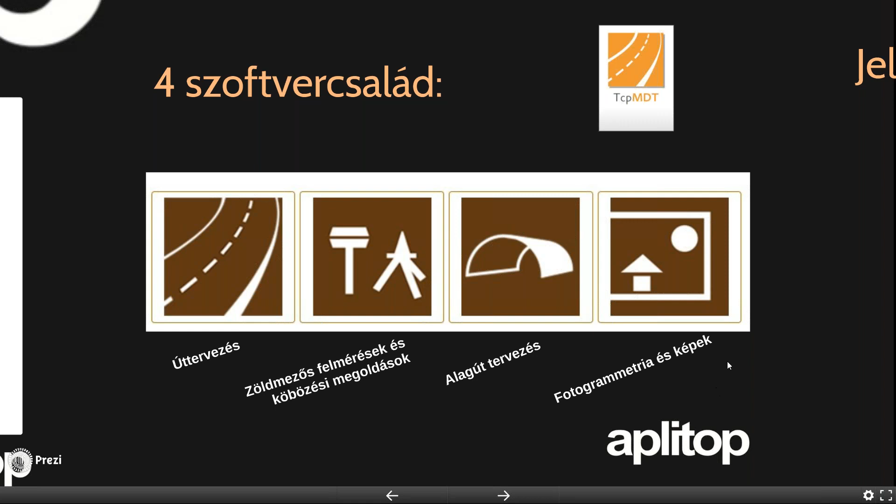To go a little bit more into TcpMDT: it has 2 possibilities, a standard version and a professional version. In both of them, we can add the image modules, the surveying modules, or the point cloud modules.

One of the best values of TcpMDT, because it is a permanent license, is that TCP/MDT was the first company to implement the IFC format, and we are able to import and export terrain surface, horizontal alignment or vertical alignment in BIM format. So we are already working to certainly meet the needs of the future. This is really interesting, knowing it's permanent, that this software can be used for a long time.

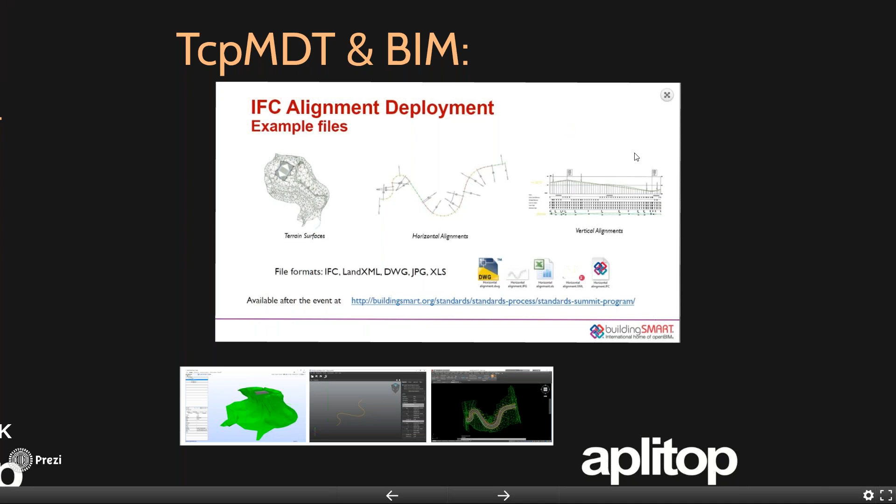Thank you very much for your attention regarding Aplitop and who we are. And now we are going to follow up with the demonstration.

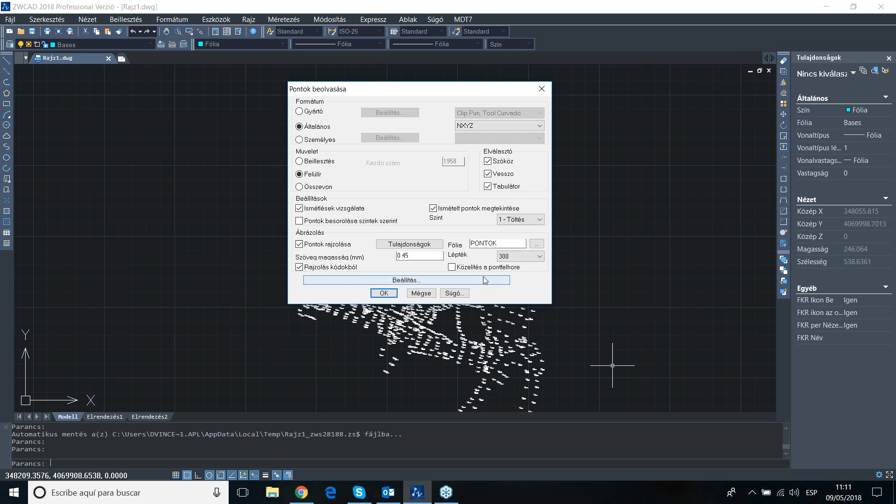So I import the points and I will get this part in just one second. I need my notes because my Hungarian is not so great. I have already imported some points. This is points of an urbanization close to where we are in Malaga.

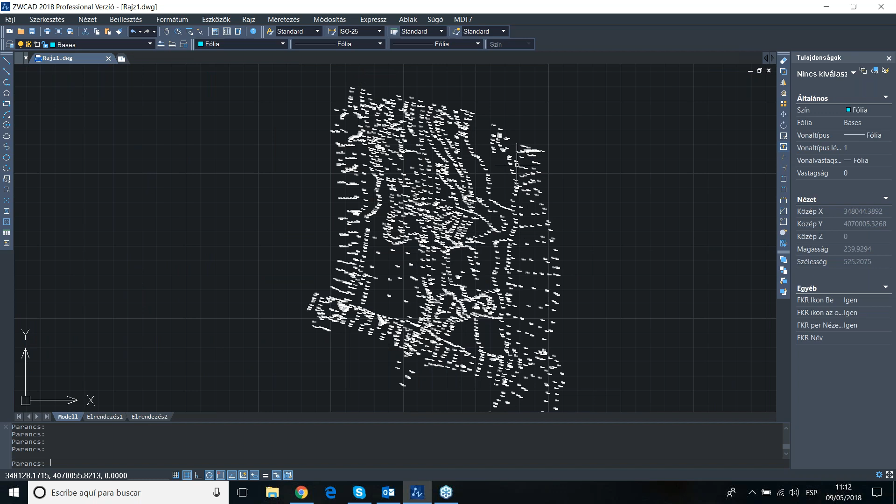Since we have the points, the first thing we can do is create our surface. MDT7, Felületek...

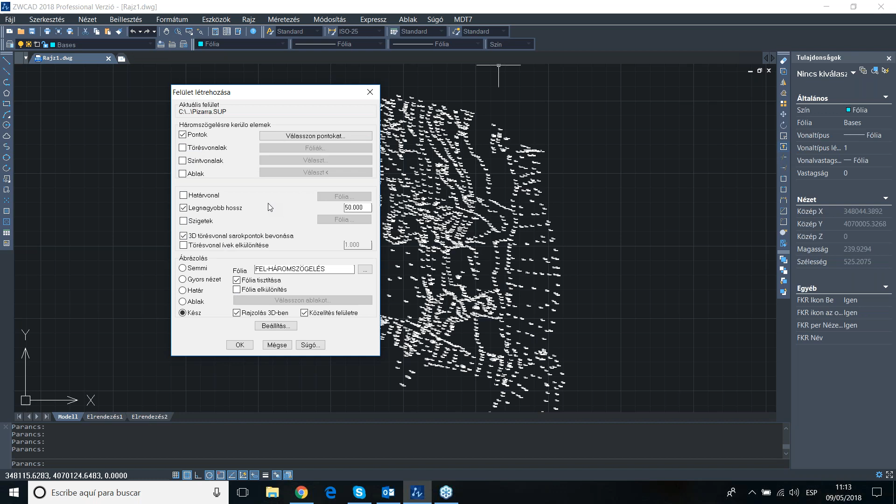So I will import and make a triangulation of this one every 50 meters. I don't want to have more than 50 meters. There is a possibility to incorporate the elements you need for the triangulation, but as I don't feel confident with your language, I don't want to go into all the options of MDT, just to explain small functions.

As you can see, it's very fast, very quick, really productive. In less than 10 seconds we already have the triangulations. There are some parts we are not happy with in the triangulation—for example, this one is really big and we're not interested in it.

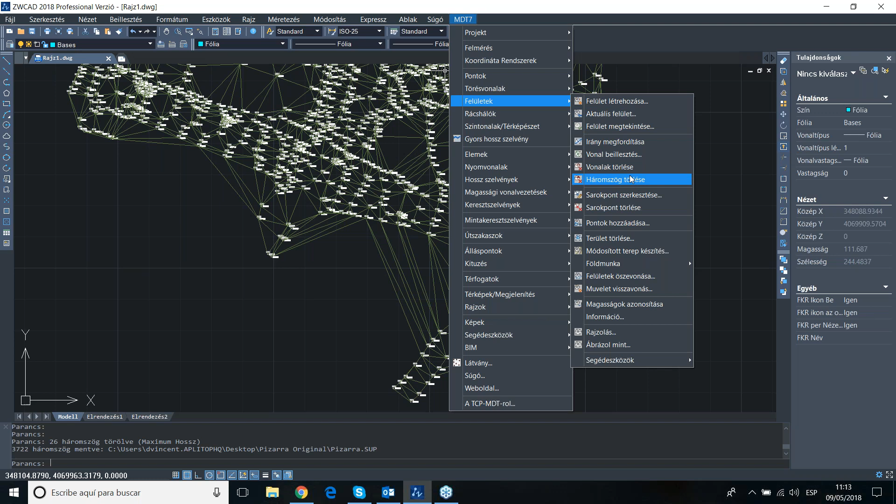You can go to MDT7, superficies, and Háromszög törlése. I select the element I don't want, and this one, and you can delete what you want.

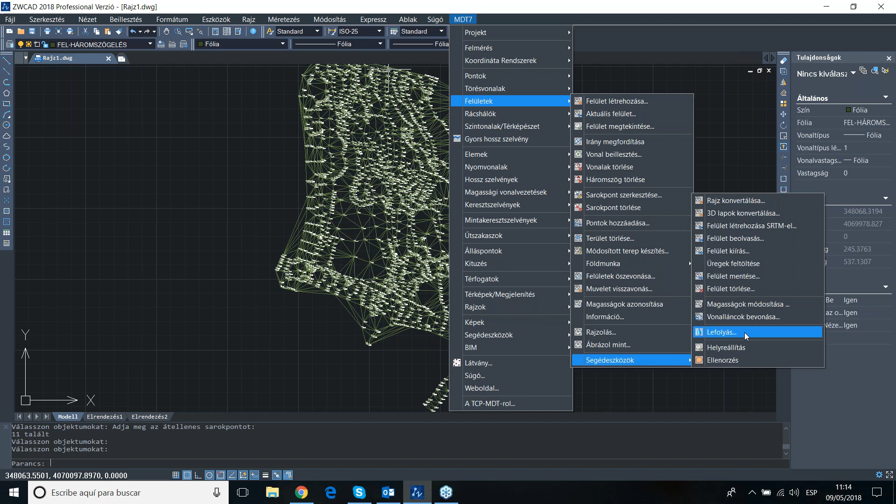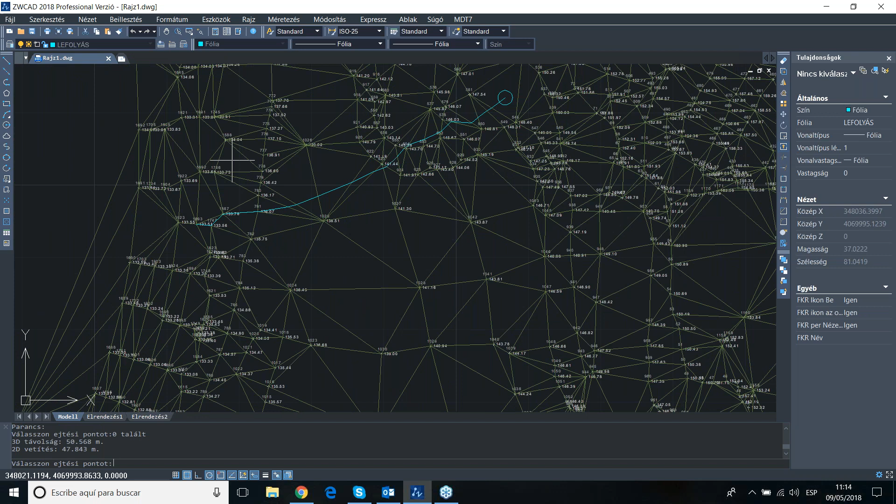There's another specific tool if we want to know about the surface, which is really nice. You can go to MDT7, superficies, and in utilities you have drop, water drop. So you say, I want to know where the water goes from this point, and this is the base, and we see the water will go up to the end of the surface, going this way. We can do another point—in this part, for example, the same, and in this part, the same. This is a great possibility.

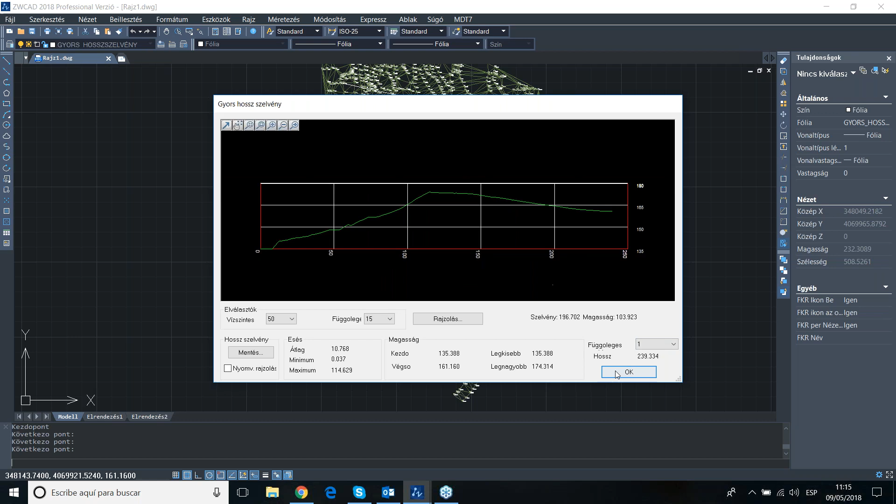Since we know the surface, the next step will be to create contours. How do we do that? Really easy—as you can see, MDT has been developed to find the element really quick and fast. Normally, the average time to understand TCP MDT is around 1 or 2 days, and you can start to be productive. So for surveying or civil engineering, this software is really productive for companies.

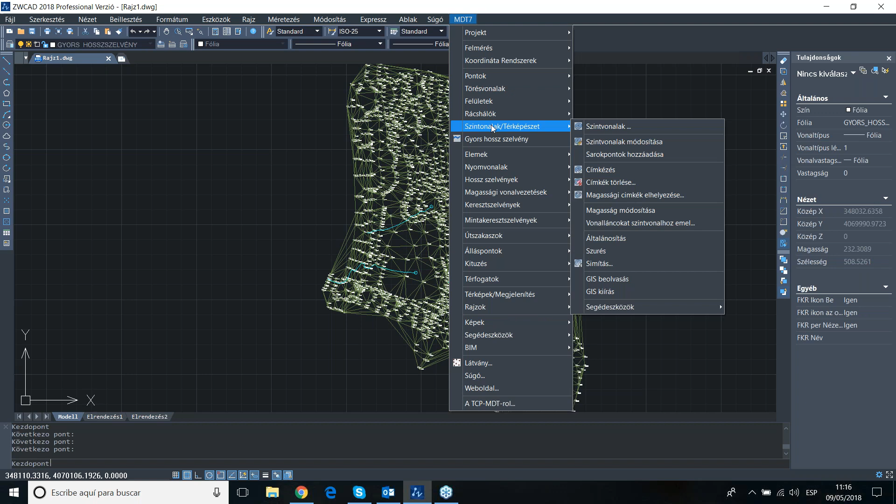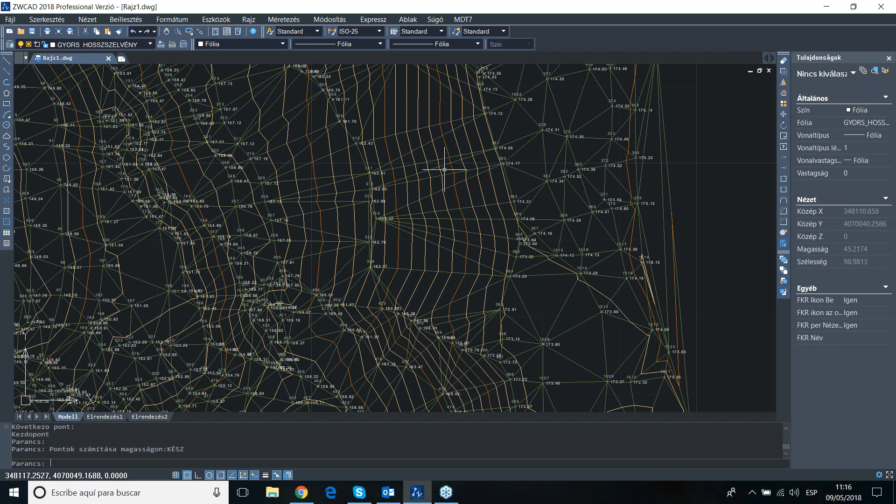So we go to contours and get the contours, from this surface. As you can see, we get the fourth, small one and the big one—the minor and major lines of the contours.

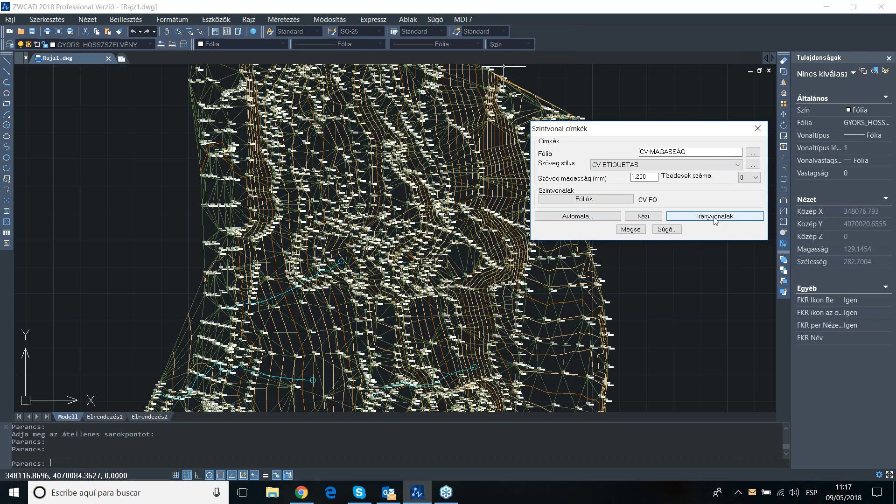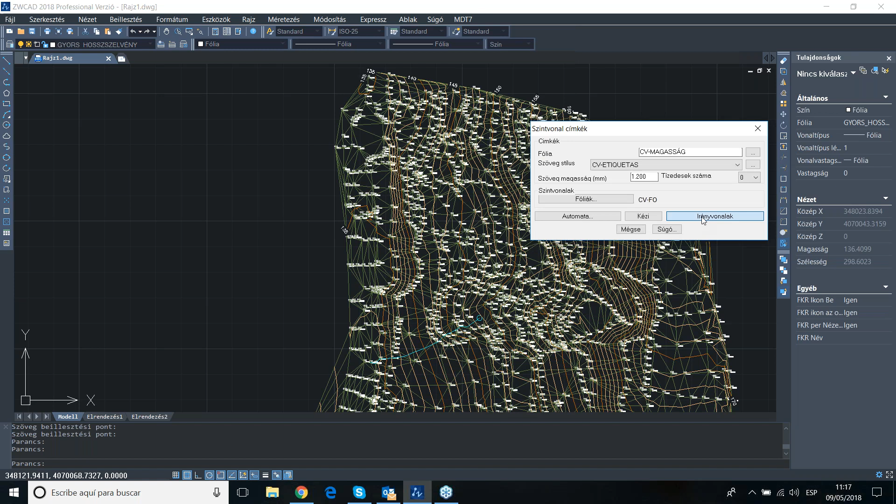I'm going to proceed. Okay, and you have the point. The last one that I like, which is really nice, is by direction line. If you want, I'll do it here, and you choose one, draw your line, and automatically it will draw your code on this part.

There are several modules, as I told you before in the introduction of Aplitop TCP MDT. One of the modules is the surveying module, with all these functions, to coordinate for total station observation and this kind of thing.

If we want to convert from one datum to another datum, is it possible? You have a lot of possibilities. This is to convert from one datum to another datum, and you already have the Hungarian coordinate system implemented in TCP MDT. All has been already developed.

The second module, which is not necessary to purchase since they're independent modules, is the image module - TCP Image. For example, there are several possibilities, but imagine I want to go to local map services.

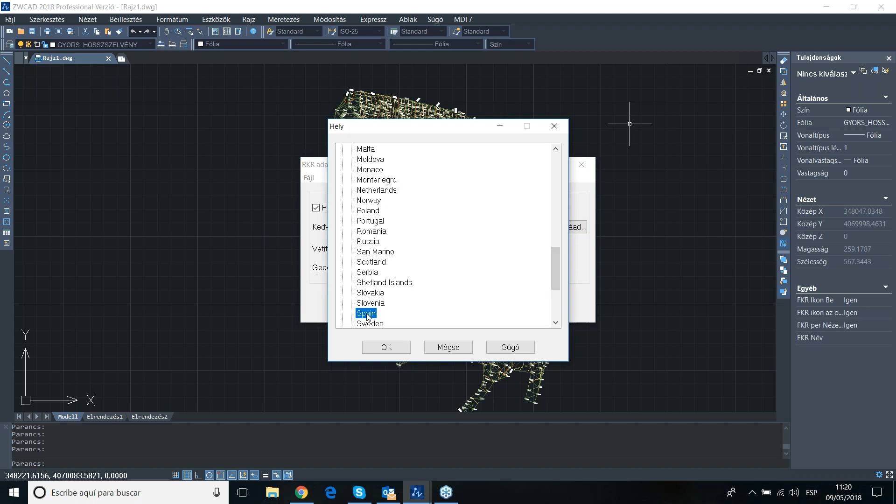Spain, okay, and here. I need to put the reference of where I have taken this, where my terrain is in the field. If not, it's not working. That's why. Okay, and now I can do it. So I select where I want to download the image.

I need orthophoto - really important, really important. This function, I will explain at the end what's happening with it, okay? It's really nice, really important. I'll explain at the end of the demonstration why it's so important.

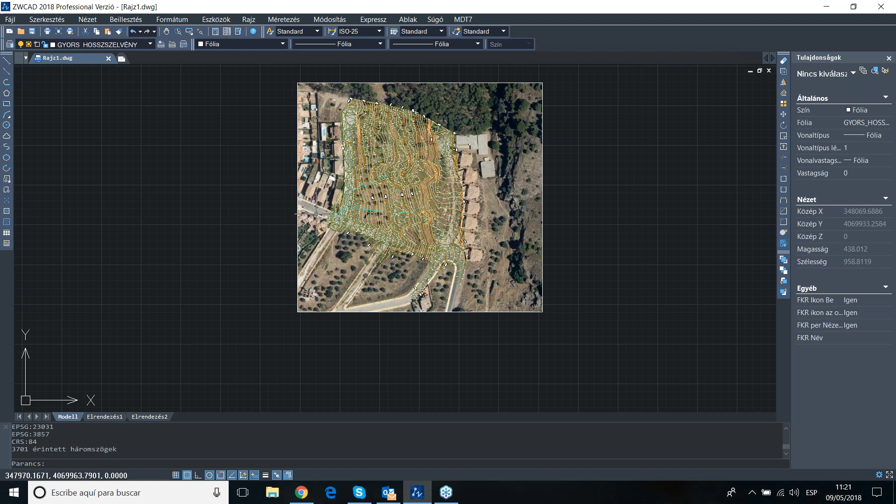As you see, our terrain has been captured very well. This is the urbanization, and we want to do this new part of the urbanization. This is the actual road, and this is some way not finished yet. This is one of the possibilities of the image module. Let's continue.

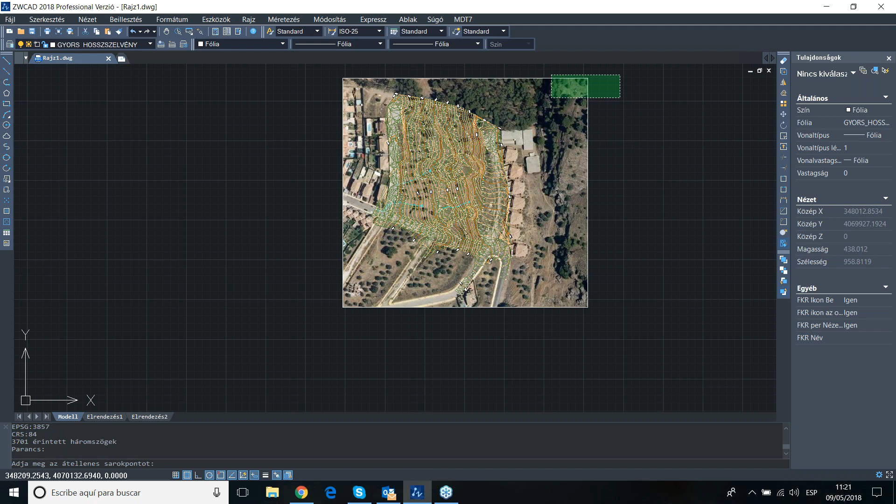Sorry, I'm changing to a new note, so I'll remove this. Now the thing we can do is, imagine we want to create a plot to construct one house. I've already prepared an example, so I'm going to use the layers manager from ZWCAD, X-reference, and upload a terrain.

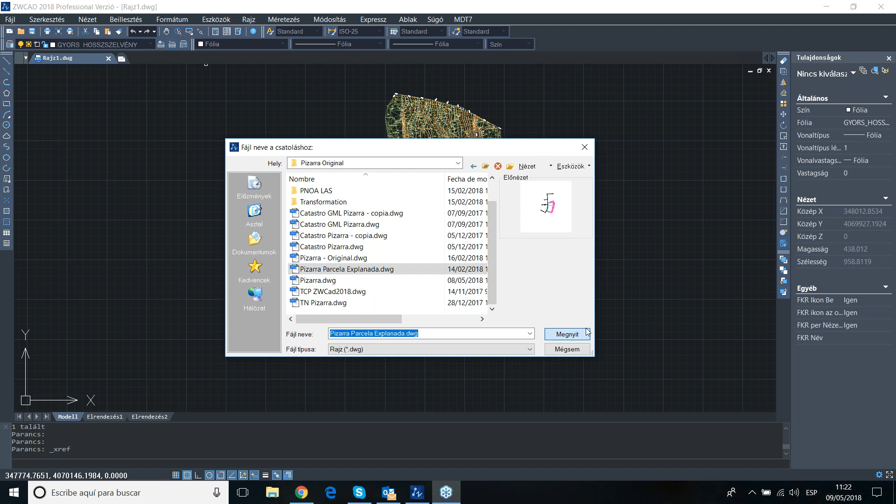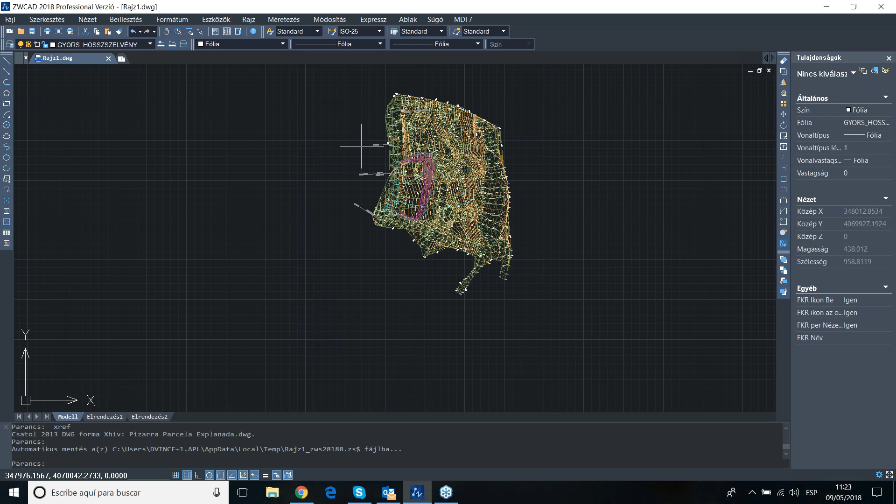Okay, great, as you can see - maybe we don't see it well. I'm going to do one thing, subdivide. If I remove that, maybe we'll see it better. I found it, I'll remove the points. As you can see, this is the explanation we have done.

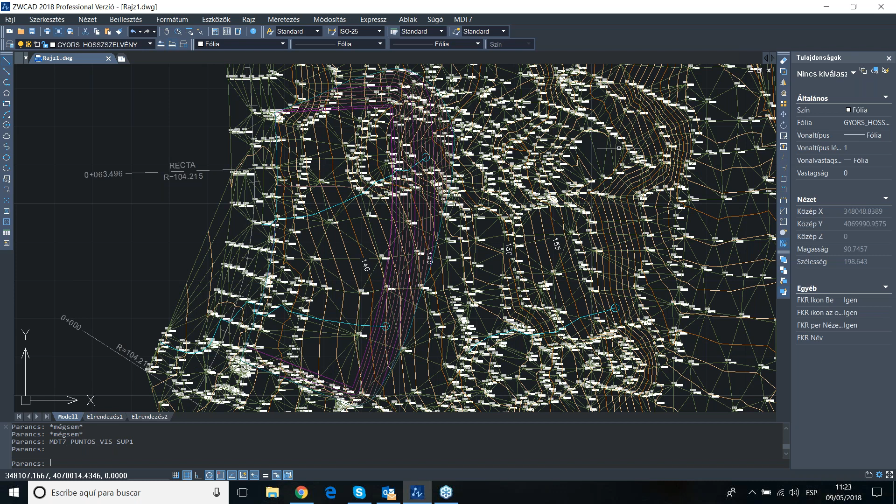This is what we would like to make as an excavation. Let me put everything back again. I can apply also the code of the total station if we need it, but I will not do it. When we've done this part, the next thing we can do is calculate the volumes.

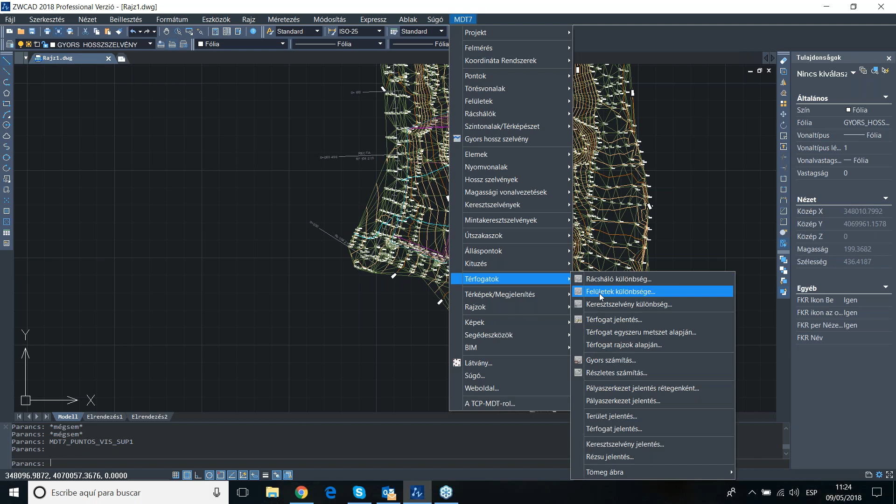So to do that, we go to MDT7, Térfogatok, by difference of surface. What we do in this case - perfect - we select our original terrain without modification, and the terrain with the excavation we have performed. Here we get the cut volume, the fill volume.

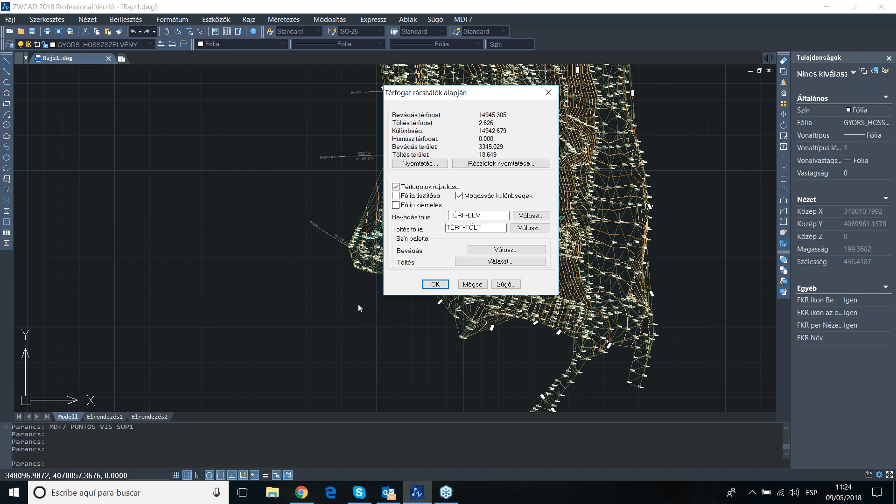We can draw it if you want, draw a legend, and we are going to do these things. You can print, you can do a lot of things in this case. And here, the legend.

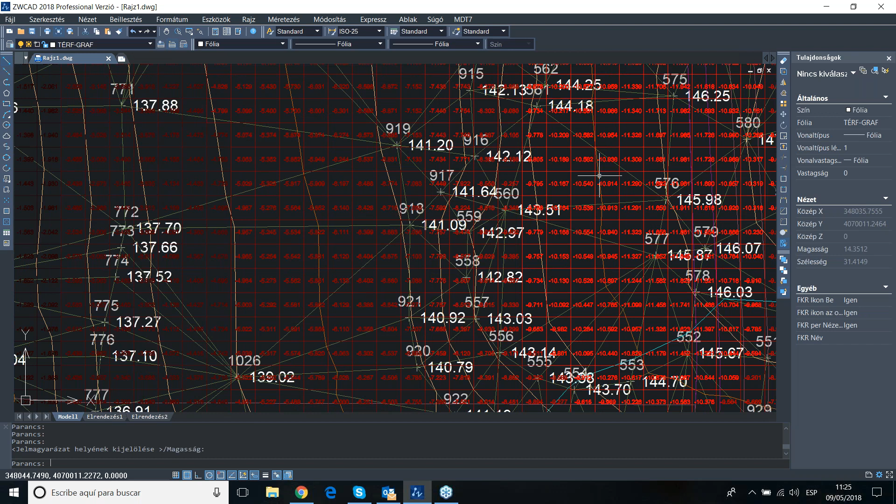If you see the legend, this is the part, and if we go there, as you can see, everything has been defined by the software in each cell that we've been defining. This is a possibility for civil terrain movement, to get calculations by average area, to create and get our volumes.

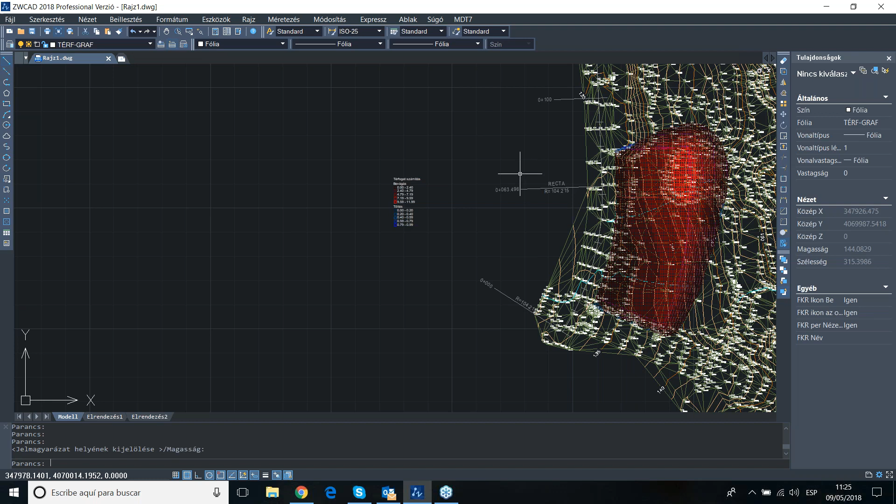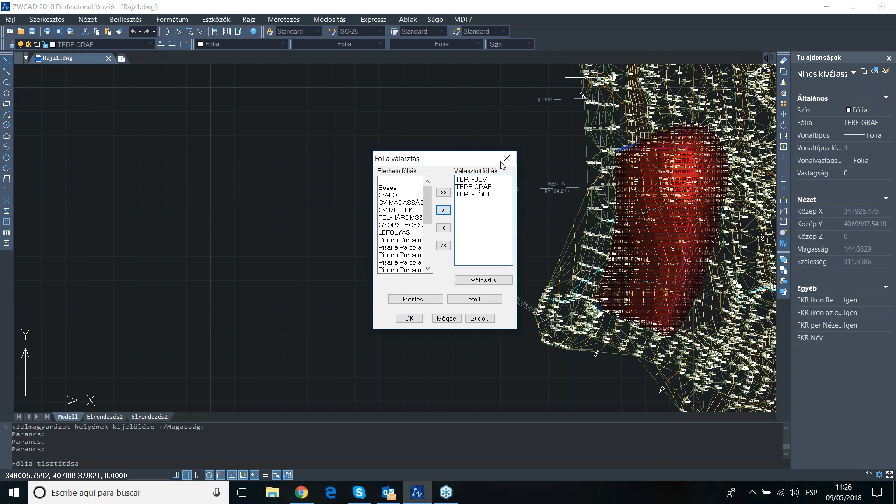Now we're going to delete this part because I'd like to draw a road project. So first we clean it - I'm going to clean in utilities, and remove these three. Now I'm going to download this part. Let's continue, now my terrain is clean.

The second thing we can do is import an alignment. To do an alignment is really easy - you take a polyline, I don't have one to show as an example, but you draw your polyline, and with MDT7, in new here, convert polyline to alignment.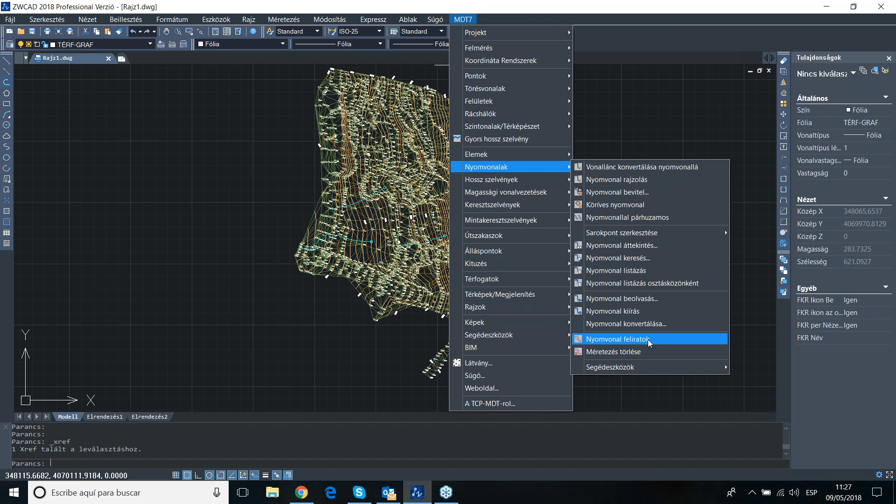In my case, I've already prepared an alignment with great radius to match the road project well in this terrain. So the thing I'm going to do is import my alignment - to import is via Nyomvonal beolvasás.

Okay, this is my alignment. And as you can see, well, not so well, but this is my alignment.

Okay, let's do it again. And I am going to remove the point. Okay, here you can see the alignment that we have done.

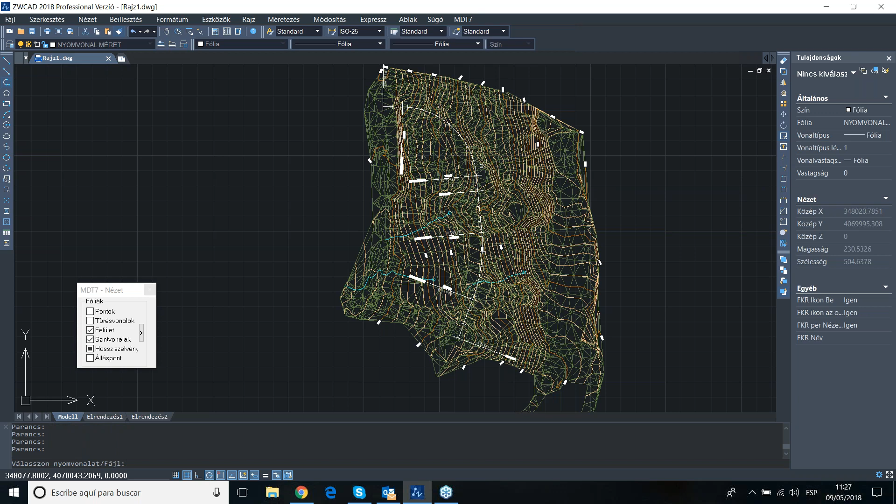Since we have the alignment, we can... I took my third page of notes. Okay, and we can do a profile. How do we do a profile? Get profile. Okay, I select my alignment.

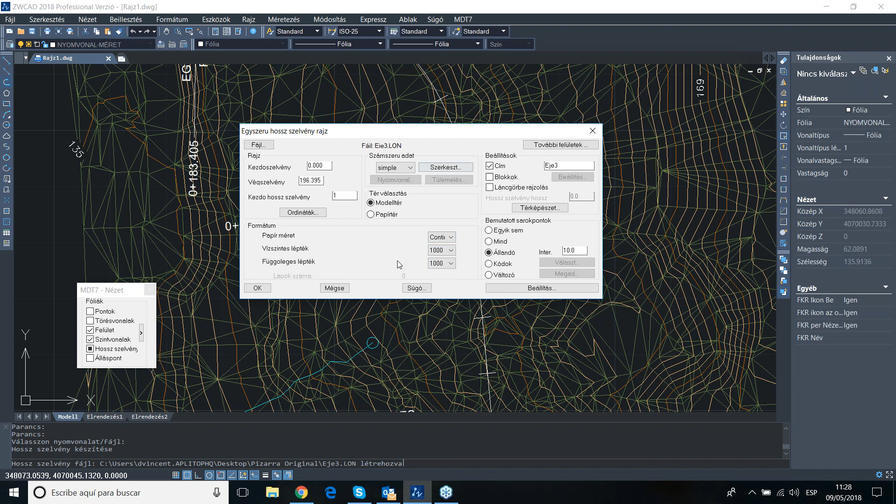So several possibilities about it. You can draw it in one paper, put your name and your company, and keep it in TCP MDT to use when you want. But in this case, I'm going to draw it directly to ZWCAD.

Okay, don't worry. So this is my profile, my long profile. I don't know why, but I don't change the language. I'm going to proceed for the next one.

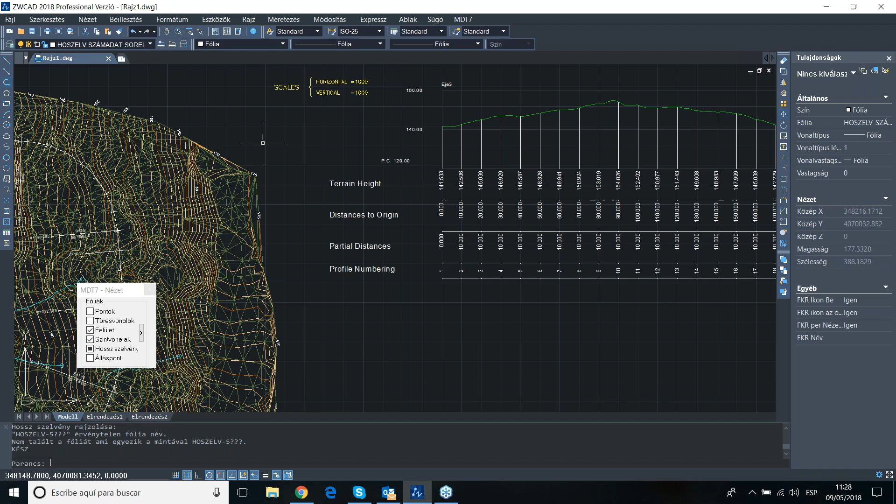Okay, this is the profile. You can get the profile. But this can be in Hungarian also.

So now, cross section MDT7. Now that we have the profile, we can do the next step. I need... how do I do that? Utilities. Okay, I'm going to follow up. Let's see.

Now the thing that we can do is cross section. So cross section is this one. And okay, get the cross section.

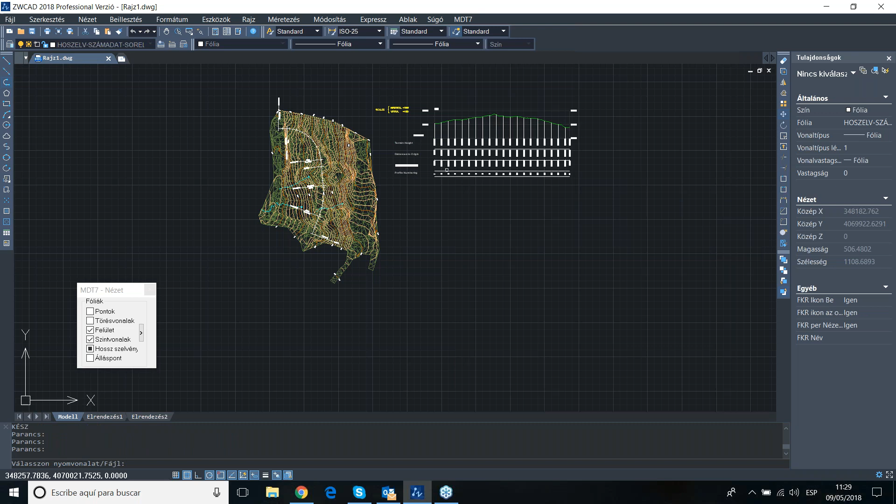Okay, so 20 in each one, interval of 10 for each cross section.

Okay, this is not continuous. This is in paper meter, in Hungarian. Not continuous, as I put continuous before here, it was in English. But if you put the other setting, it appears in Hungarian.

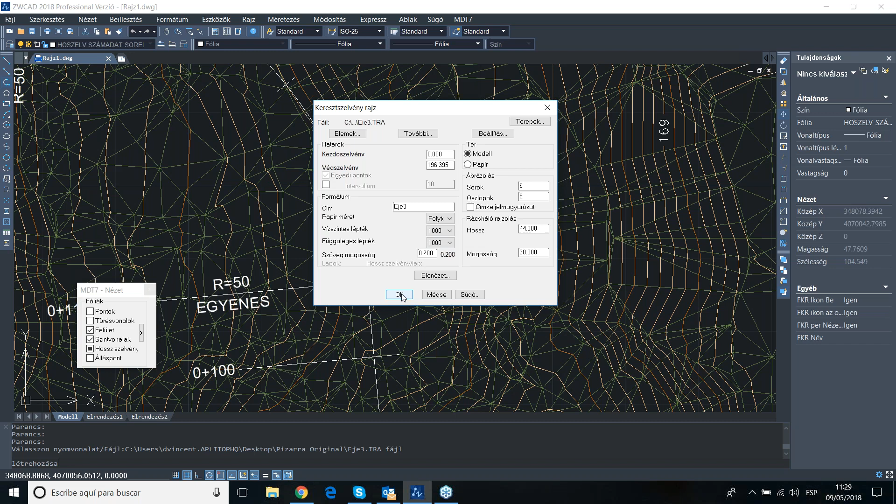Okay, so now let's draw it. Okay, great.

So up to this moment, we are talking about the standard version with all the functions we have seen, to get the cross section, the profile, make volumes, and this kind of things. It is on the standard version.

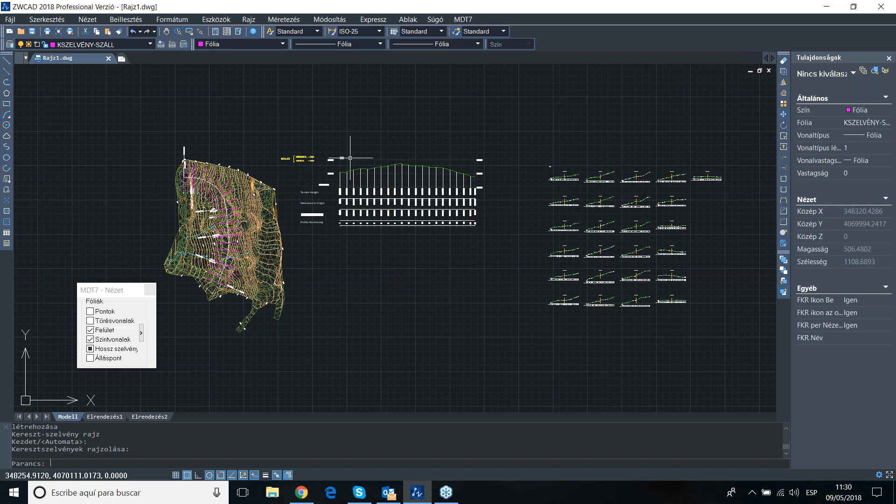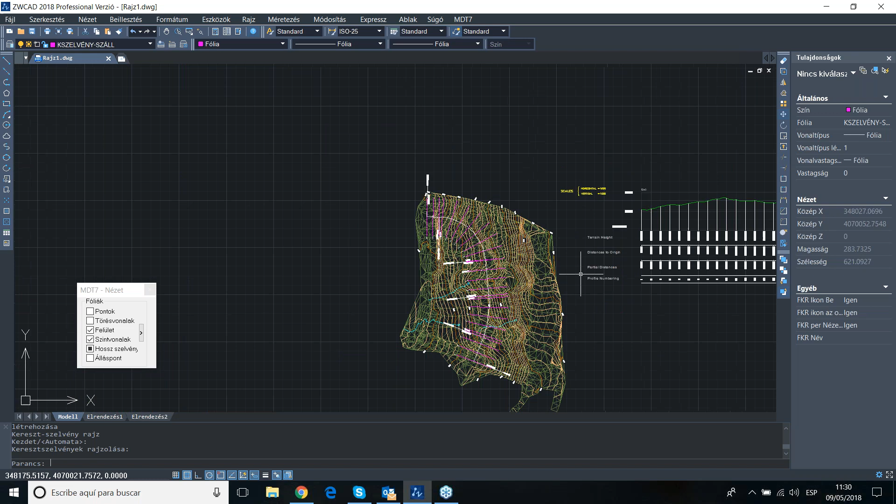Okay, so this is now, yeah, and this is in Hungarian. Each profile for each point kilometer, how it will be. Here we can see directly in the drawing all the cross sections we have been defining. So this is up to the standard version, the possibilities we are able to manage with TCP MDT.

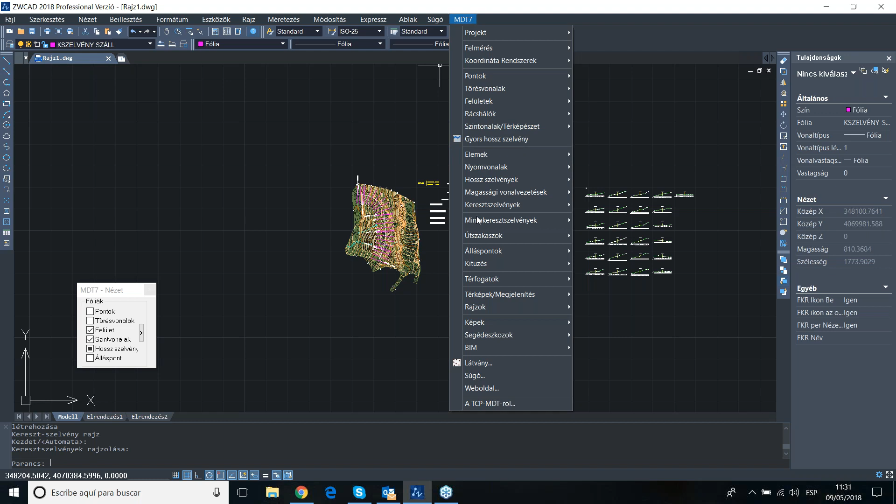Now we are going to follow up with the philosophy of the professional version. The philosophy of Aplitop is the following: in TCP/MDT, you can find a component that is called a segment. So we've got to define the segment. Okay, so this is a segment.

And the segment is all the points that we have been defining, like the alignment, the profile, the cross section, all the things that we have been managing.

Templates, if we view it, okay, the template is how our road project will be. So in this part, in each PK we have, we are able to define the following elements. The platform, we can create several platforms with several things.

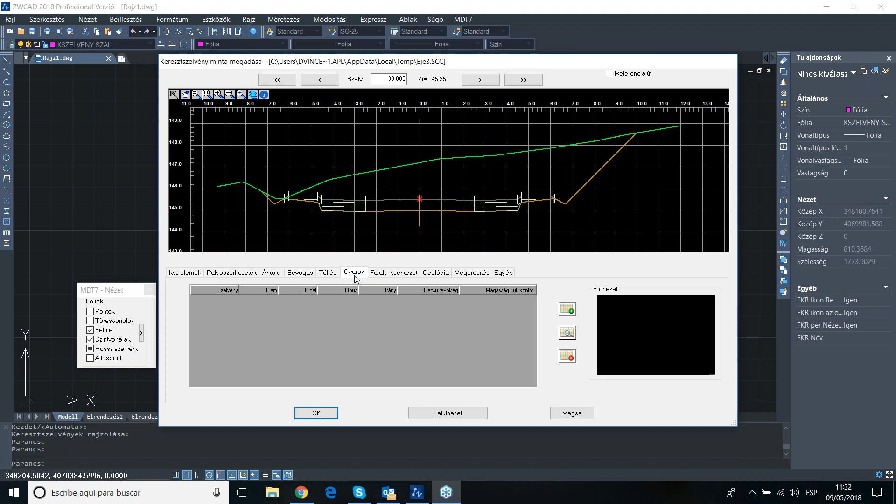In each part it is possible to define different things. Another thing that is really important: you can save this definition in TCP/MDT. So when we have a road project and you have already defined which reinforcement, which is the geology, you are able to reuse all this data in order to avoid creating it again. So you can win a lot of time with this function.

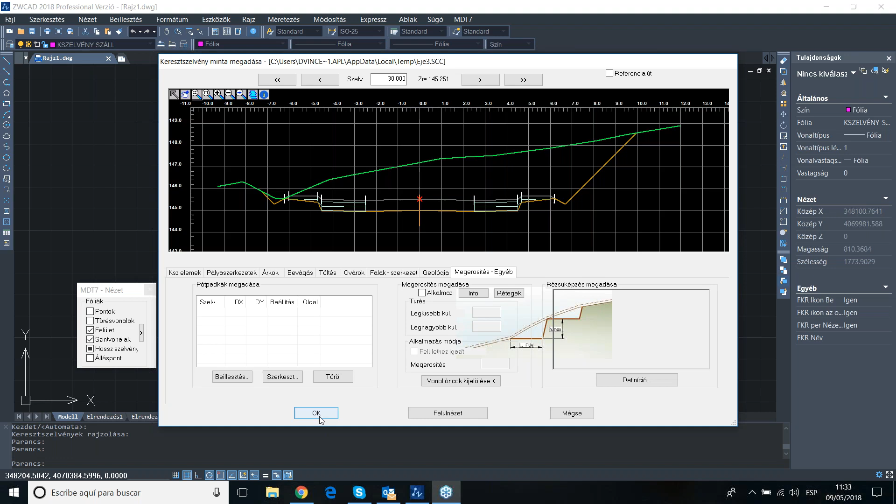So if we have defined everything, the first thing that we will do is check if everything goes well - there is no dead angle, all has been generated without error. That means that the road is nice and there is no danger.

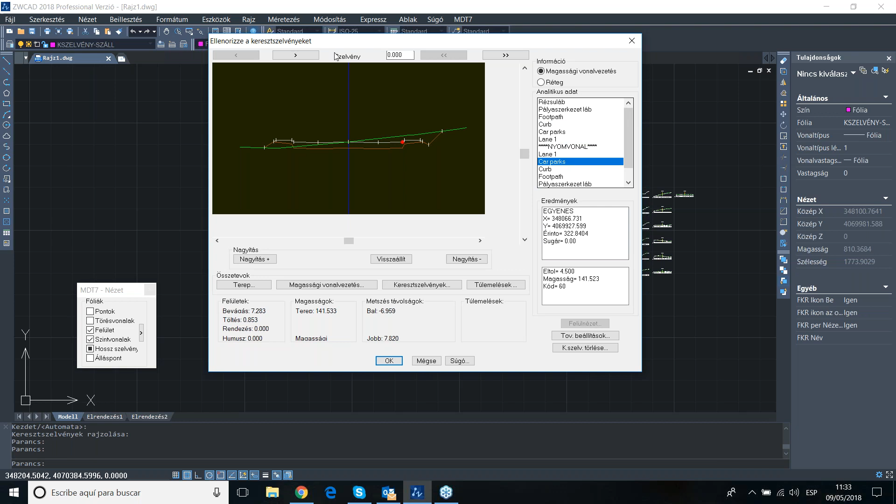Another possibility is to check also... I don't know how you say that in English, I believe it's lane one. No, footpath. Okay, well, in each part you can define, you can check your points and see, by kilometer point, where is your point, and if you need to make some change or these kind of things.

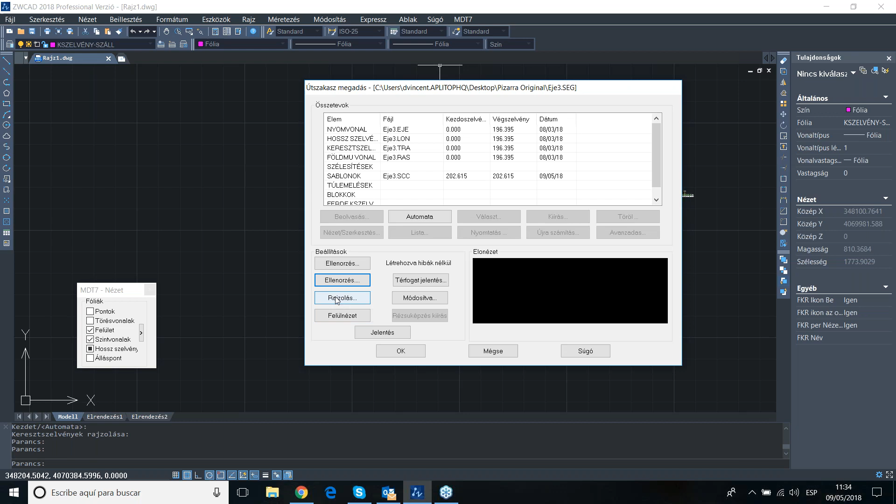And we are drawing all the profile of the road project that we have been doing. We have done it - you see, it's quite fast. It's really fast, and this computer is not so... it's not so new. So you see that TCP/MDT is really productive and efficient.

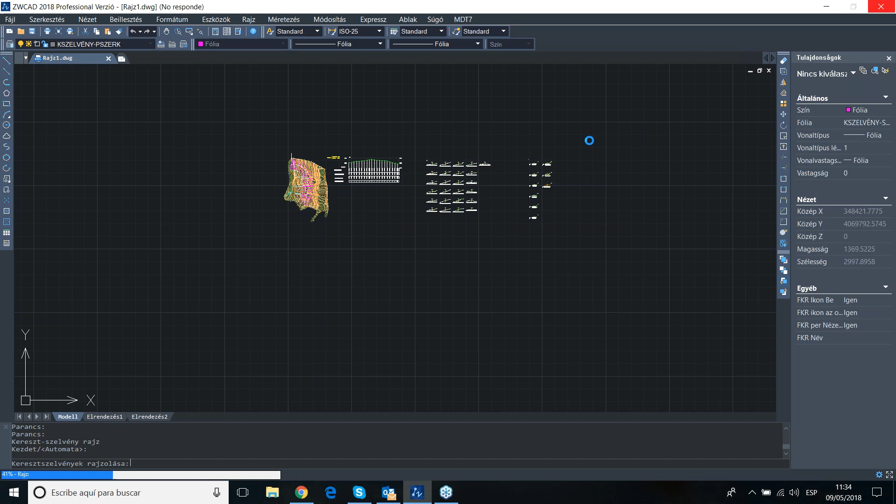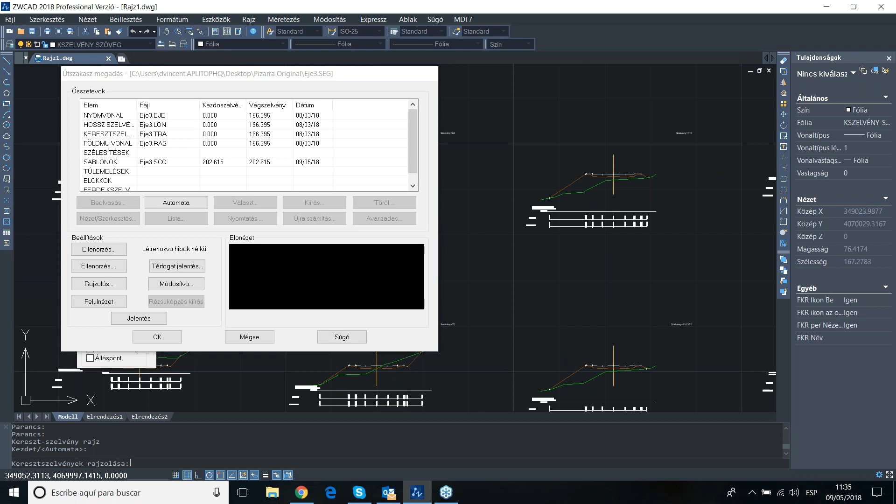Until I finish, this is some of the profile with the cut, the fill, and all these things, by each PK, by each point. We can get a top view of the road if we want to double check.

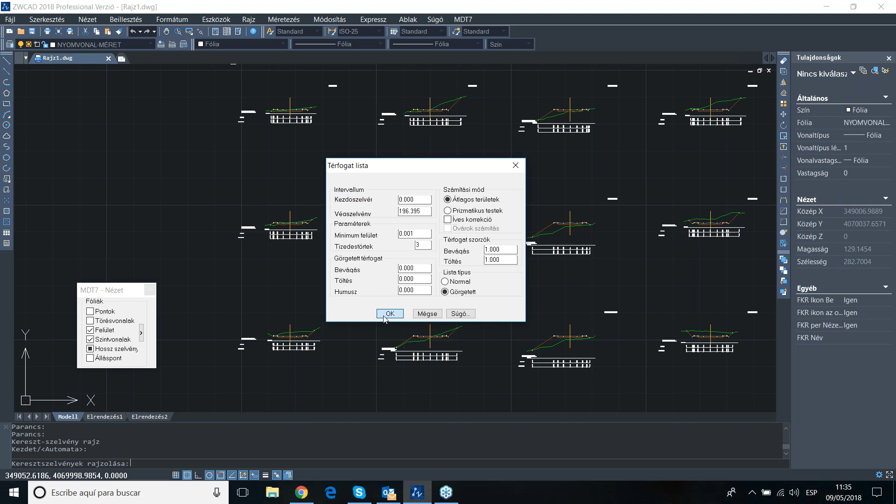Now we can get the volume report, the volume report by average area. Here we can find all the things about the volumes. So we have all the things.

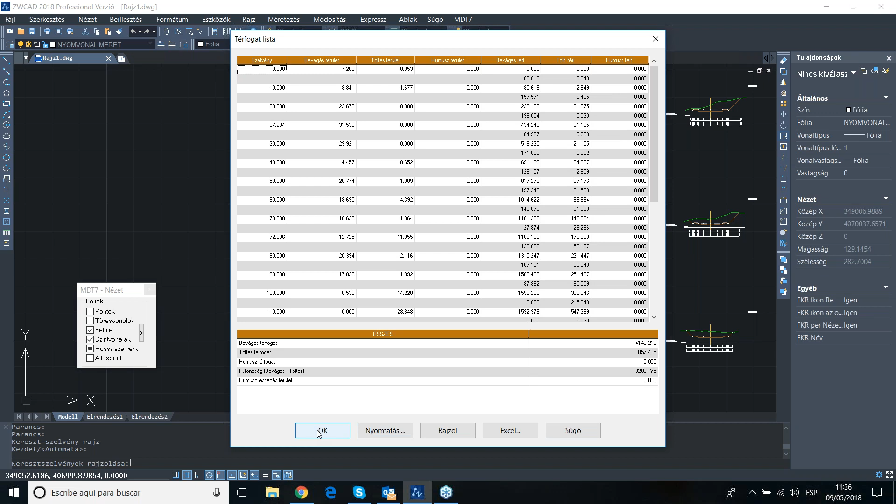If we define more things in TCP/MDT like geology, all can be detailed. You can export to Excel, PDF, a lot of functions to be able to do it. I have not noted where the function is to show you this part, but it is possible. In this case I'm going to do okay because it's the only word I know. Now I'm going to do one last thing.

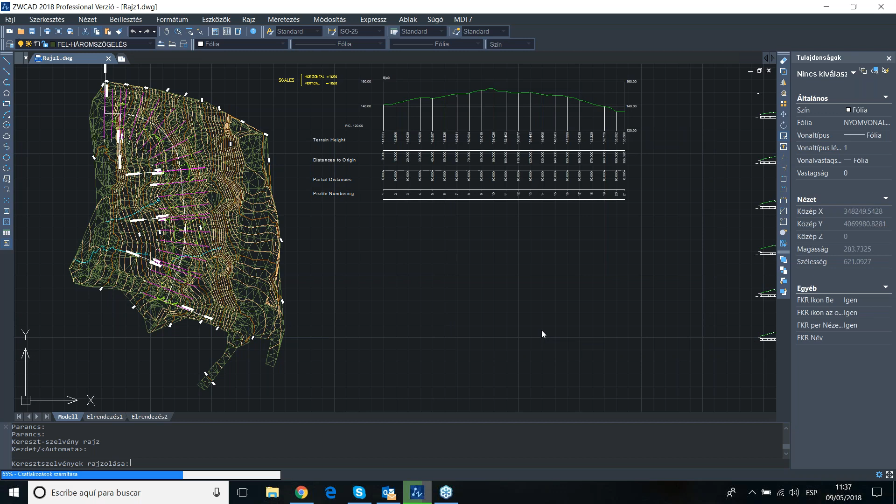So we agree with our road project. Now I can do the modification of it. And you see now the new triangulation with the road project implemented into our original terrain.

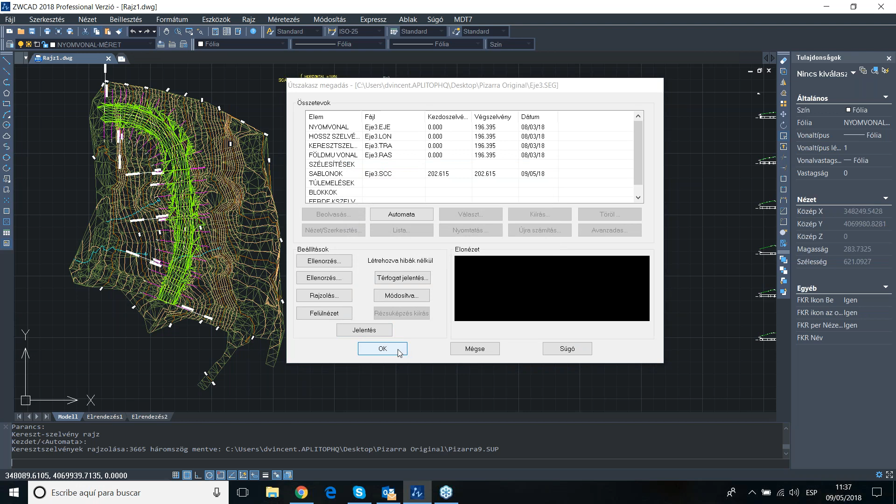When it is done, there's another possibility to create a report. I won't go inside, but there's a lot of possibility to create reports with all the things you need and make all the changes you need about these reports.

So now we can proceed to a quick profile, and you see that our road project is well defined into the terrain.

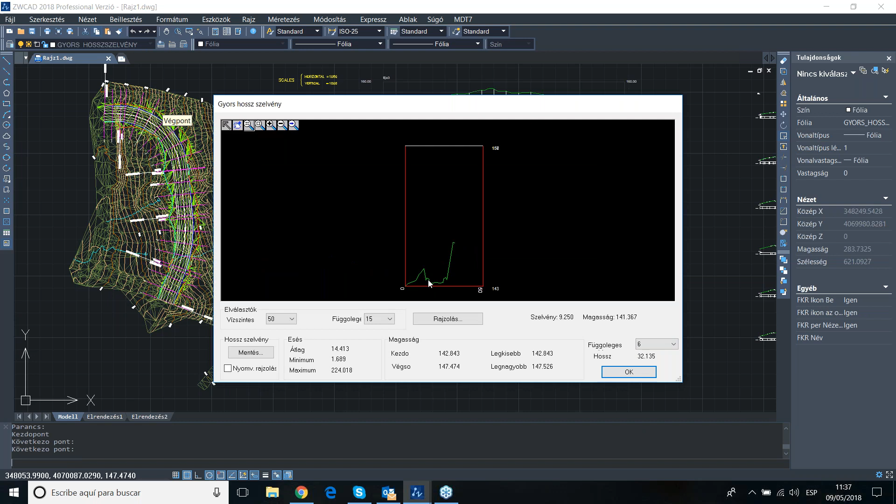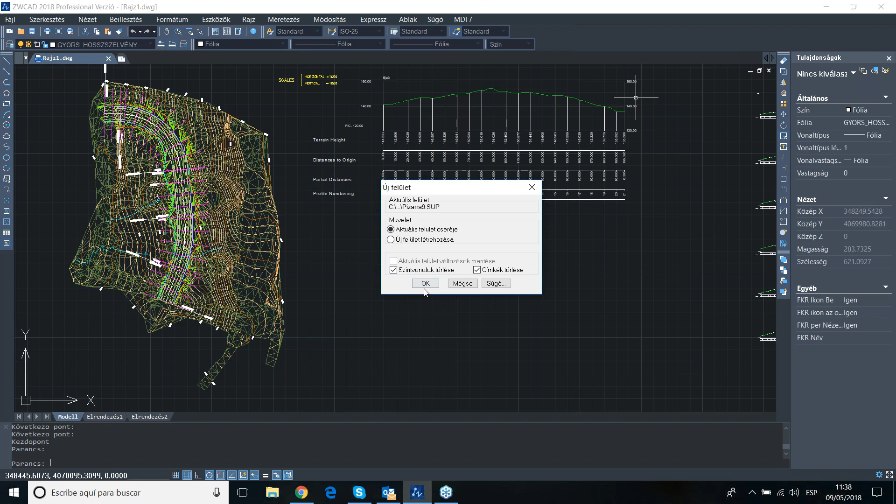We can also do a new triangulation of this terrain. How was superficies? I need my notes. The first part, Felület, MDT7, Felület. Okay, so now I have redone the triangulation in order that it is implemented with the new surfaces.

To finish, there are also really great things in TCP/MDT that are thought for the final clients, the clients of our clients. One of these is TCP/MDT. We go to maps, and we can export entities to Google Earth.

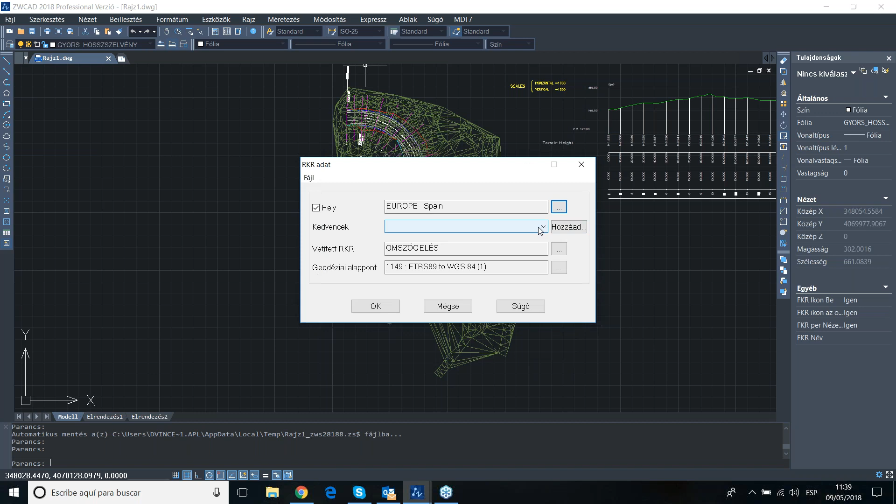Otra vez, okay, so I need to put again Spain. So Hungary, it is here.

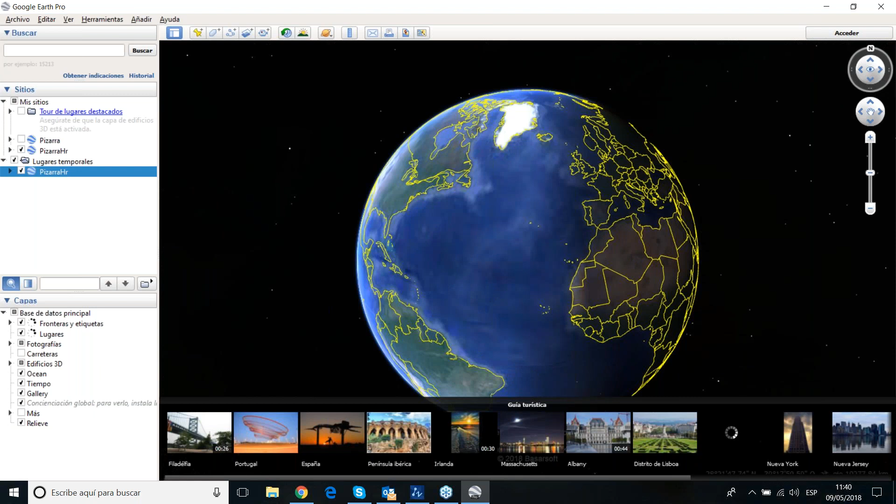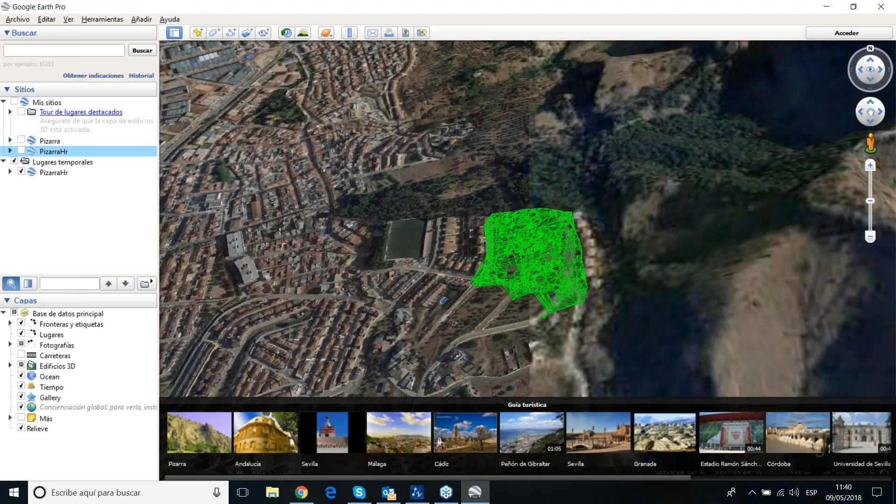As you can see, we can export all the elements we want about this road project into the new triangulation and all the contours, the curves of high with the road project. We can export this to Google Earth and send to the client in KML files.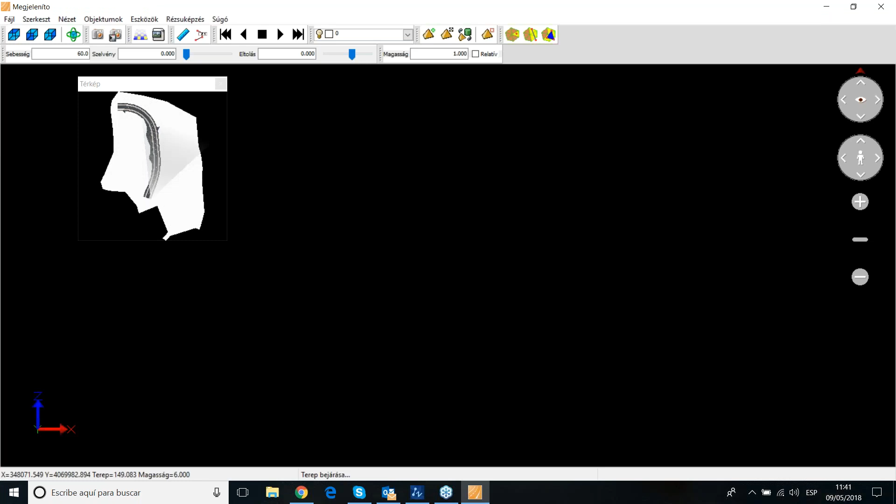So you remember when I told you at the beginning of the event about one element that is really important to remember: with TCP MDT you are able to create a video, and you are able to apply a texture on the renders that you are going to create.

Ah, what's happening? No. So in this case it has not worked. Okay, maybe I've made a confusion.

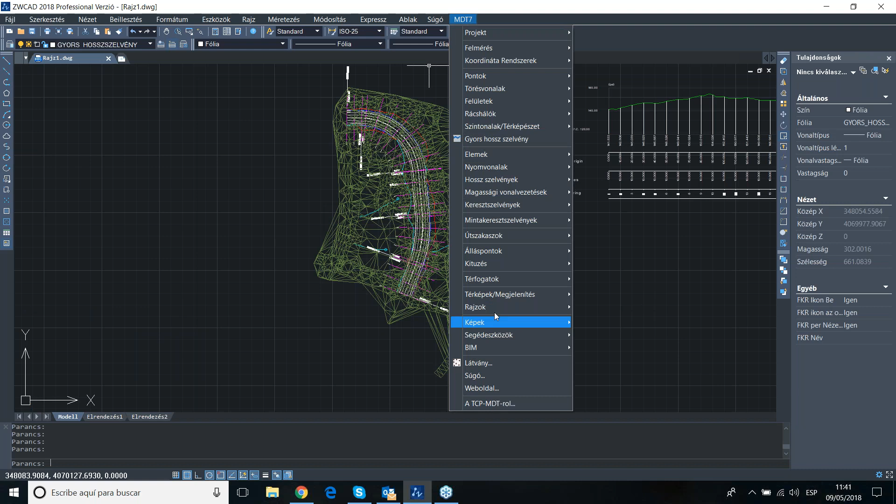Let me check. Secondly, MDT7. So this is Út bejárás, and from here, and this one, and my segment where I have defined my things. But this is from Pizarra Original. Can I use maybe this one?

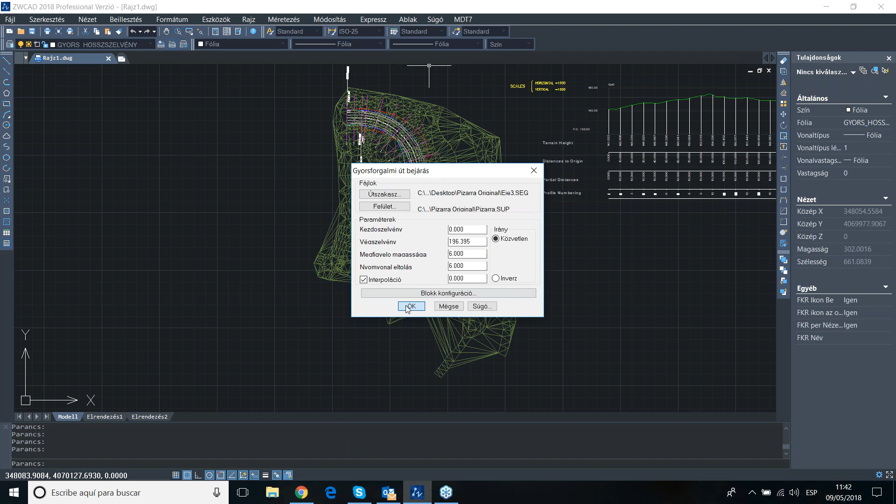Let me double check. Okay, okay.

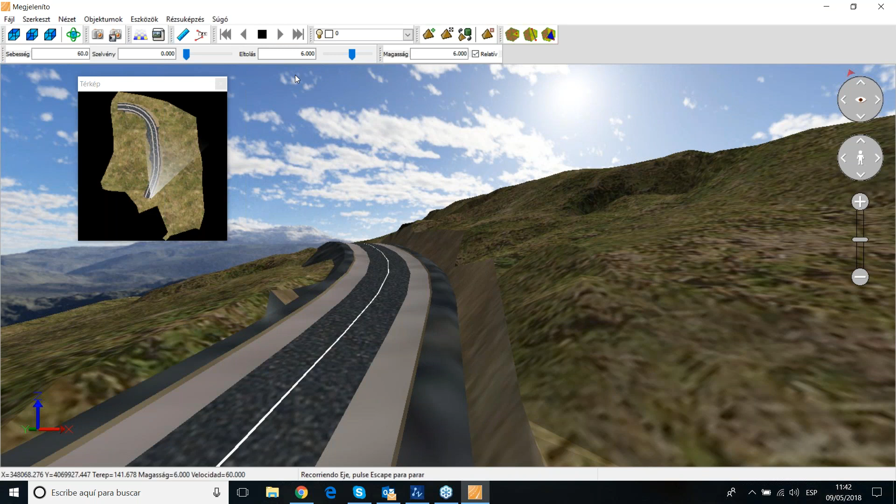Yes, and now as you see, when you apply the texture, you can get all the things about the terrains. You can manage the picture in the background, and like this you can record an MP4 video. And if we see, we have our road project, how it has been defined, and we can create something really realistic to send to the clients in order to have something really interesting.

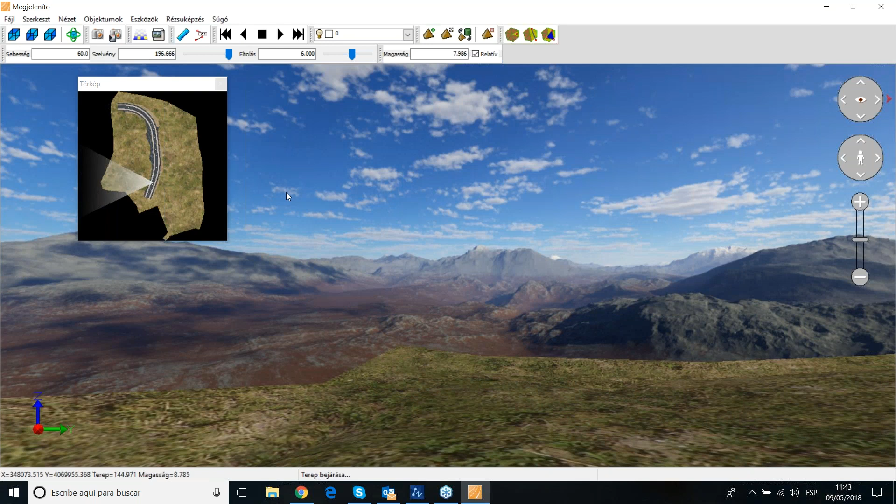And I have finished for today to introduce you to this software. I hope you have liked it particularly.